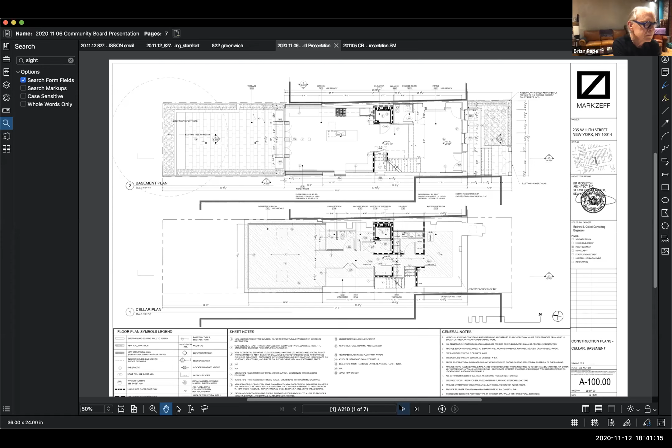We're looking at A100, which is the basement and cellar levels. On these plans, 11th Street is on the right and the rear yard is on the left. We are proposing to extend the cellar, the lower of the two drawings, at the rear. And then we are extending the rear of the first floor, where the cursor is right now. And then re-landscaping the rear yard. On the front, we are maintaining the existing front yard. We will slightly widen the steps down to the front entrance, and we'll slightly widen the front entrance. In the center of the plan, you can see plan north, the elevator, and plan south, the stairs. Next, please.

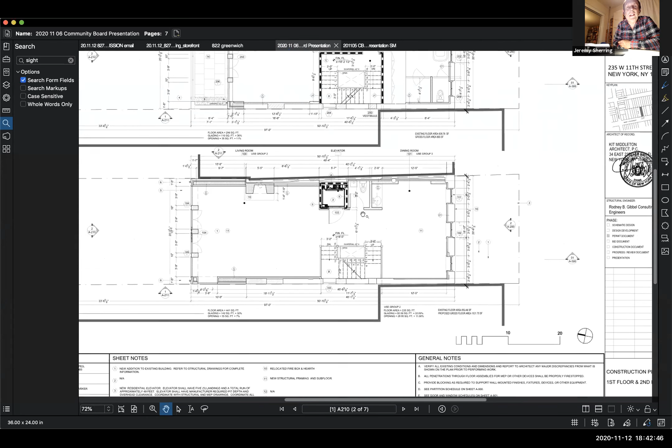Okay, so the upper plan, sorry, let's talk about the lower plan. This is drawing 101. At the rear, we have the living room, which is again extended like the basement level. And in the front, we have the dining area. Again, in the center of the plan, the stairs and the elevator. Then the upper plan is the second floor, which at the rear has the master bedroom, with a setback and terrace over the first floor living room. At the front, we have the master bathroom. Next, please.

Okay, looking at drawing A102, the lower of the plans is the third floor plan. On the front, no change. All casement windows will be replaced in kind. Center of the plan, again, the elevator and the stairs. And then the rear has a slight extension on the third floor, that's the rear bedroom. If we look at the next plan up, this is the existing fourth floor, which was added in the 1920s, we believe, per landmarks and historic documentation. So this will be a bedroom, and at the rear there'll be a terrace. It's pretty much per the existing envelope, changed slightly because of the location of the elevator and the stair. And then that partial plan is the roof of the fourth floor. At the rear terrace level, we'll maintain or renovate the existing skylight. The glass band you can see at plan center, on the top floor, is the skylight. There's an existing skylight there now, and our intent is to build a new skylight in its place. Next, please.

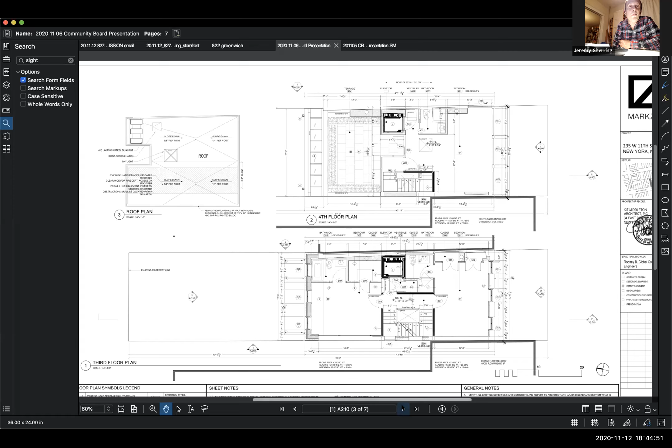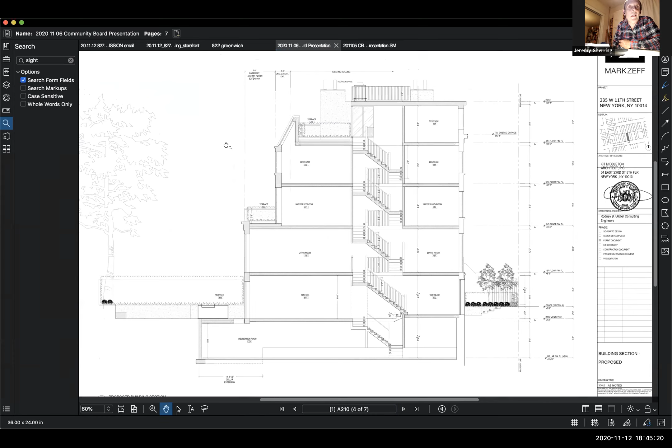Okay, so drawing 301. On the right is 11th Street and the front yard, and at the left is the rear yard. In this drawing you can see the extension to the cellar level below grade, and then the extension to the basement and first floors, and the setback at the third floor, which is maintained.

Excuse me, while we're on this drawing, could you indicate exactly where the excavation is in connection with this extension? So if we go to the cellar level, and then plan drawing left, you'll see the excavation. Keep going left at the cellar level. Yes, exactly, that's the below grade. And how deep into the garden is that? Hang on, if we go back to the... that's not correct, by the way. It has to... oh, there you go. Okay, sorry, you got it. Are we good?

So we're going to extend. We have another 24 feet to the rear yard from the inside face of that wall, so take another foot off that, so 23 feet to the rear yard property line. So the depth of the extension from the house to the cellar limit level is 20 feet. Okay, that's good, thank you. That's the extent of the extension to the existing masonry. That is not the extension to the existing wood framed addition that's on the rear of the building now. That's fine.

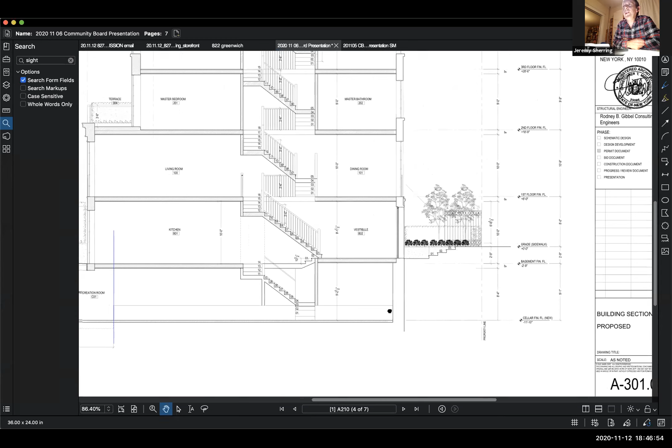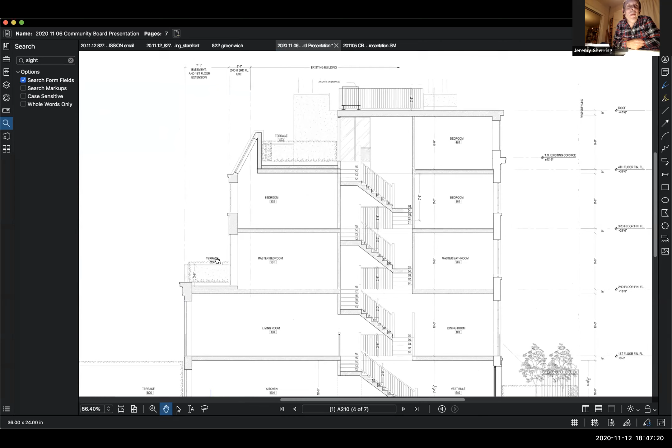As I was saying, the setback levels, second and third floor. Let's scroll down to see the further setback and get the top floor. We've got the setback at fourth floor level behind the skylight. The skylight is that diagonal line you can see above third floor.

You don't have an existing section or conditions plan or elevation as part of this package, do you? I have the elevations, but not the existing section in this package, though we have one. If you want to bring it onto your screen and share that, it might be good, because we often look at the building section, existing and proposed, to get a better idea of what exactly you're proposing, what's there, and the magnitude of these changes. That just helps us. But if you want to keep going, we can come back to that if the group wants.

Okay, let's do that version. Next drawing. So here you can see the existing rear elevation, and on the right the proposed rear elevation, and in the middle a photo of the rear elevation.

In the middle, the photograph's probably easier to understand. At the basement level, you can see the basement is being built out. The feeling is that the original addition is the first floor tea porch, and at some time they built out underneath that, then built on top of the tea porch as well at the second floor level. Then you see third floor and the skylight above that.

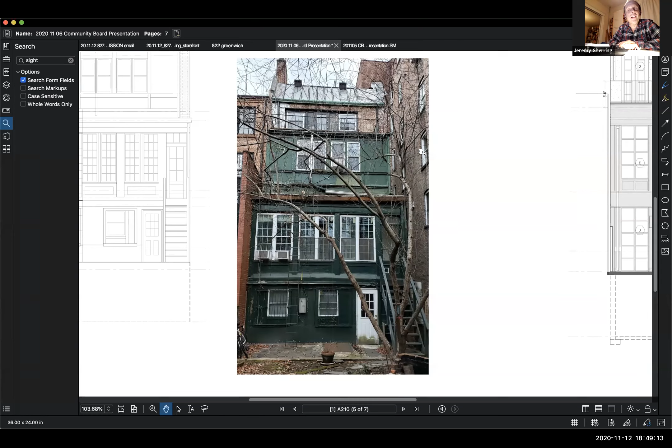So if we go to the drawing on the right, we've reinterpreted the spacing of the bays of the tea porch on the basement and first floor levels. Then we have the setback at second floor, and we've maintained the window openings on the second floor in the same way. The third floor has 3 openings, reflecting the neighboring townhouses, which similarly have 3 openings on the third floor.

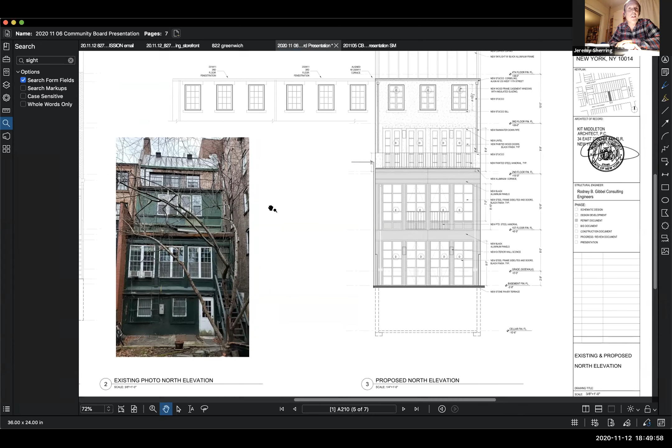Presently our house has been changed over and has 2 windows and a central door, but we're reverting back to the more traditional 3 fenestration third floor. Behind the skylight, you can see in the drawing the penthouse, or 4th floor level, which is set back behind the skylight, so you don't really see it from the rear yard.

Next drawing. So the street - on the left, the existing conditions photograph, in the middle the existing condition elevation, and on the right the proposed elevation.

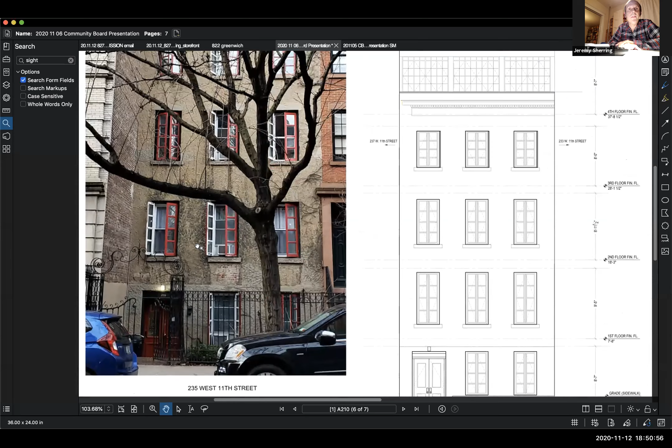First of all, we are proposing to completely renovate the existing stucco. Unfortunately the condition of the stucco is such that we'll have to remove it and put on new stucco. Our plan is, rather than this very rough textured stucco, to do a very smooth face stucco. On the right-hand elevation, you can see the front door in the left corner is slightly widened compared to the drawing in the middle.

The existing front door - that's one change. The other change we're making is that the window sills on the first floor are going to be dropped to floor level, which is actually the way the house was originally designed. The raised windows were changed over, probably in the 20s, when they converted this building to a multifamily.

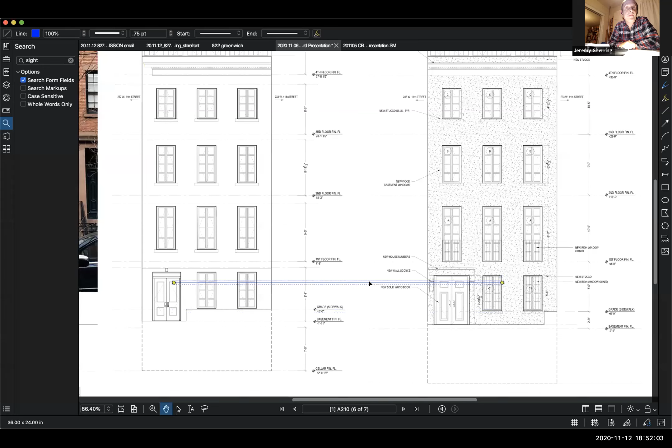Next drawing. You're also adding sconces, and yes, some texture to this - we're framing the entrance.

You're muted. Oh. You can hear me? Yeah, now we can.

Okay, we're trying not to change much at all on the street front. We did want to make the entrance a little grander, because it's going to be a single family home rather than, at the moment, a multifamily. And similarly, we're reverting back to the first floor fenestration, which was full height originally.

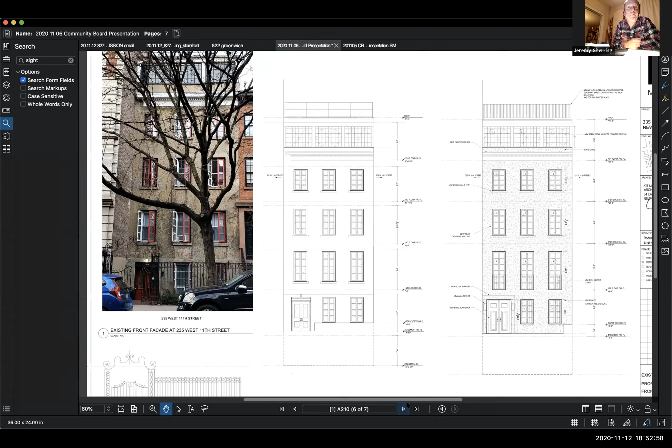Here we have renderings of drawing 210. There's a rendering on the right of the front facade and on the left, the rear facade.

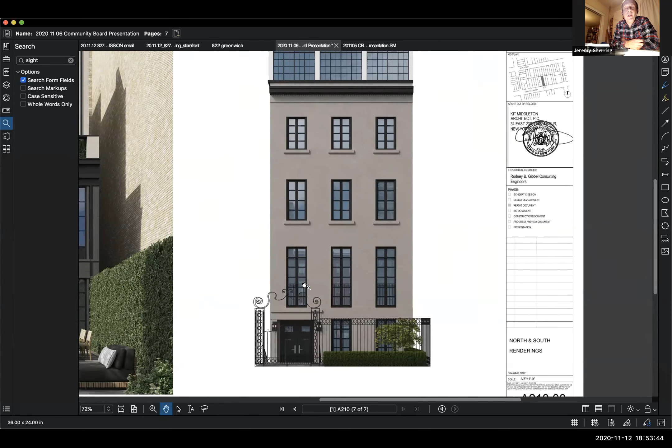May I put two questions about the front before we move on? Do we have a sample of the stucco color, or are we to rely on the rendering? We don't have samples in this presentation, but we will be doing test samples to present to landmarks in the future. The rendering is a fair representation for us.

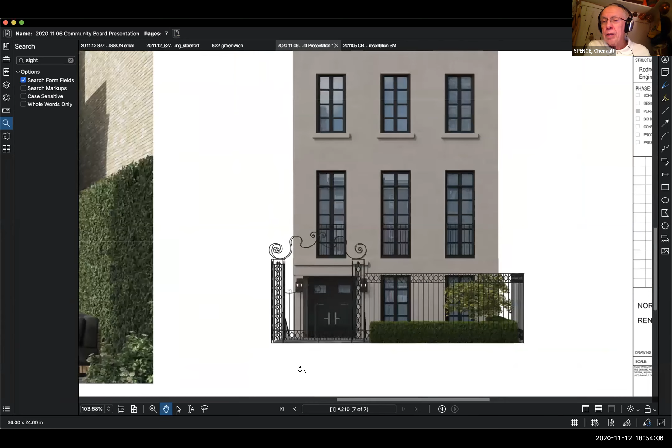And the doors, are the doors being removed? Yes, we'll be replacing the door as it's being widened, but the present door is not the original door, certainly. Correct, because the stoop was removed as well. I just need to note that.

Okay, so for the basement and first floor, the intention is to use a metal cladding, and then continue the stucco further up the facade on the second and third floors, which we hope distinguishes the second floor and the first floor and basement levels, as they are today, distinguished from the masonry section of the rear facade.

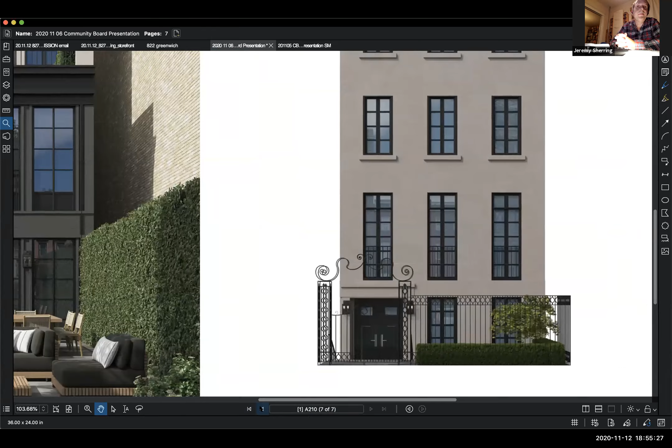We're keeping the existing street railing and gateway, and then landscaping the front yard and the rear yard. Those are all the drawings we have to show today.

I have a question. Wait, are we finished the presentation? That's it. Yes. Okay, Anita.

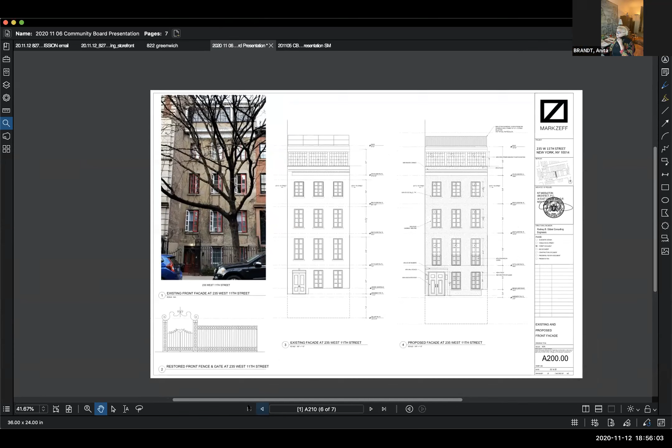Hi there, I have a couple of questions. One, I agree with Mustafa, we really aren't given as much information as I think we'd like. There's no existing plans, no existing section, no demo plan. We'd like to know what you're taking out.

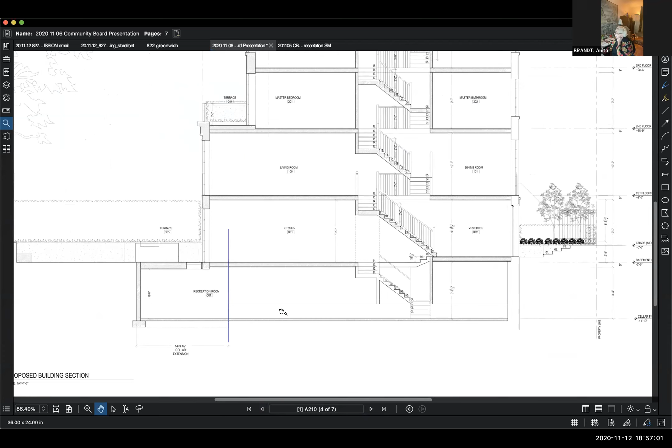Secondly, around the new widened entrance, you're recessing the areaway, I see. Excavating the areaway, is that correct? Correct. If we go back to the section — yes, so there's a recess in front of the front basement windows, it's cut away from the front. It's excavated, and you're building a new slab of some kind, right?

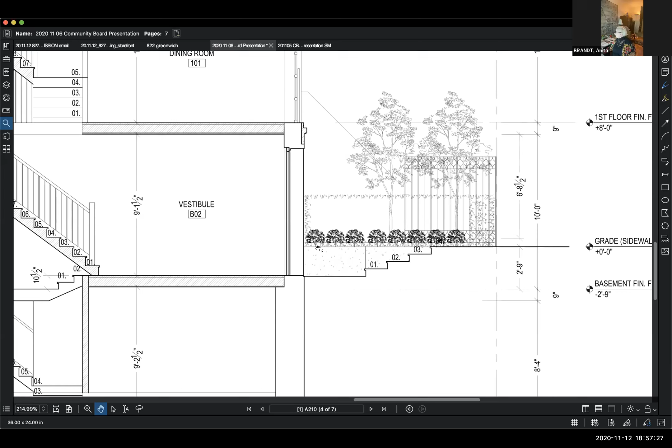There'll be bluestone. So you're dropping the level, that's what you're showing. Yes. I think that would be good to articulate because you're changing the relationship of the areaway to the sidewalk and the street, and how people perceive it. I think that would be good to be very clear about.

Maybe we can look at the floor plan. If we zoom in — okay, so the area remaining at the level it is today is the planted area on the left. The steps go down and the line of the lower step becomes the setback. Got it, good.

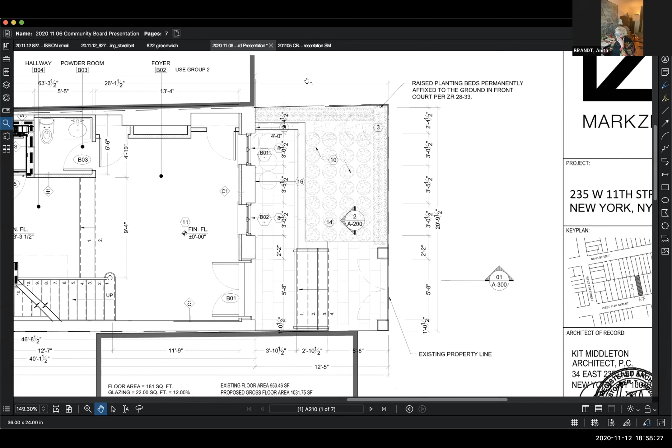And then finally, for example, the door enframement on the front facade and the information, like detail sections, what's the profile like? Is it going to look like Disneyland or is it going to look like something authentic, because that can go either way. I need it in drawings. I believe you, but I don't really want to believe you, I want you to show me, because I think these are the things that make or break a good project. Also the light fixtures, we're interested in that kind of thing. Understood, just describe it as best you can please.

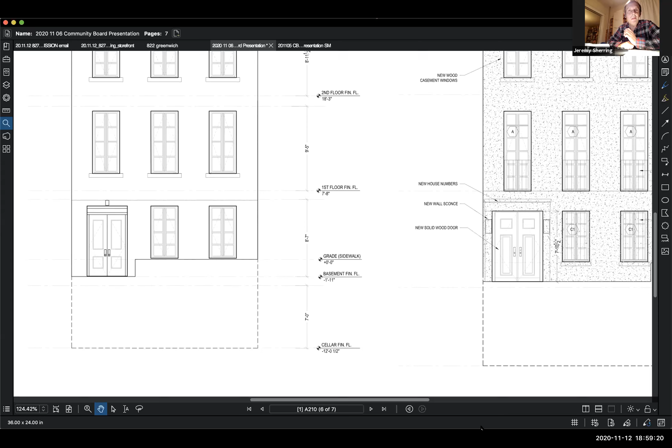Yeah, the plan is to just make a very subtle raised border around the door opening, and then over the top of it, a subtle but pronounced lintel over the door opening. Okay, not too subtle, that's exactly my problem right there. I think you should articulate that, whatever that is, whatever inches it is. You don't want it to look too flimsy either, otherwise it's going to look like a shadow, a ghost of some kind.

And finally, and then I'll be done. I like the massing of the rear and all that. Did you consider having the red brick above, maybe on the top two floors? Yes, just because...

Here's the answer, I think: the side facade of this townhouse exists because of the side yard next door, so the stucco goes along that entire side facade and wraps around on the second and third floor. Making it brick would have continued the finish of the neighboring townhouses, but this house was altered a lot in the 20s, and that's something Landmarks has told us to focus on, since it's slightly unique to the row.

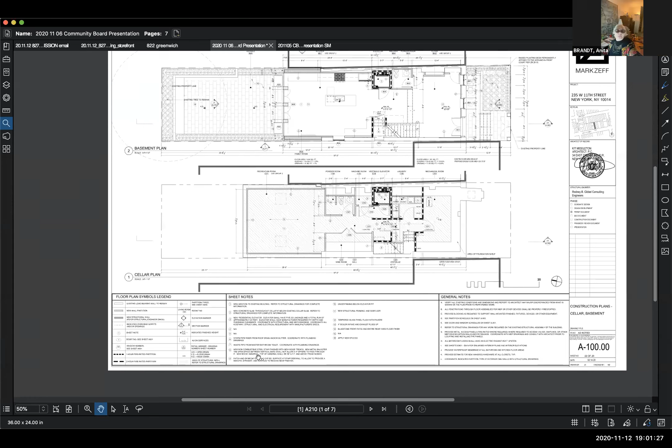That makes perfect sense. So in other words, you got a whole side facade to stucco. Yes. Are there other members of the committee who have questions or comments? Yeah, just one other thing.

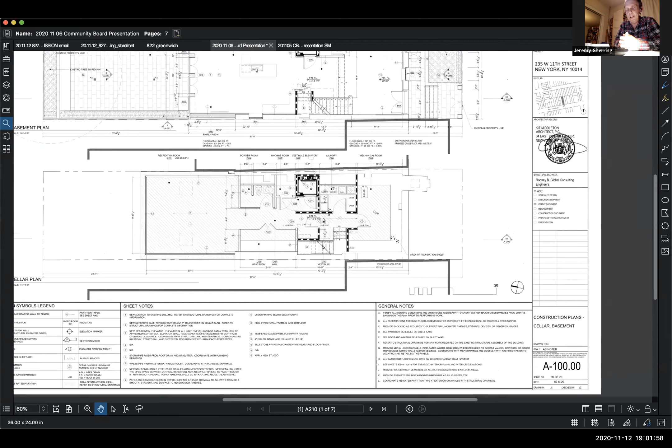Were you able to find some historic photos to help contextualize this? We have the tax photo, that's as much as we got, and then we got some Sanborns from the 1800s, but that information just confirms what we know: a wood structure on the rear and a masonry structure in the front. The tax photo is the most historic we have, and it's pretty much exactly what we see today.

Okay, good. So I have a question regarding the rear facade. It does seem that much of the rear facade had been altered in the past, as you described, tea porch and so forth. You're making the effort to restore the tripartite windows on the third floor, which I appreciate and commend. However, I'm not sure why you're taking on the second, first, and even basement floors and not using the tripartite theme on those levels. You could get just as much glazing, but instead of dividing it into quarters, you could use the tripartite division into thirds.

Even though they'd be larger portions, they would still follow the theme of dividing that rear facade into thirds. Have you considered that? Yes, we looked at doing thirds and quarters. The reason we're leaning to the 4-pane is really, could we look at that rear rendering again? The reason we're working with four is because of the influence of the tea porch bay system, which was four windows. Yeah, but that's not original to the building.

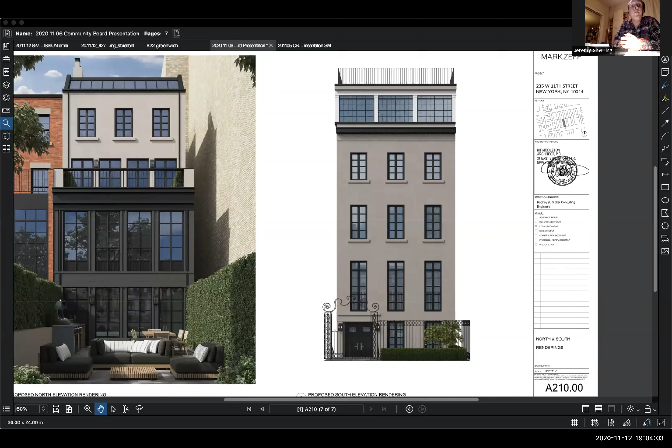Well, it's interesting - Landmarks is very fond of the tea porch extensions, and it's actually very historically significant for them. We worked with them trying to find an expression that developed from the existing tea porch that's there now. And I agree that the three-opening is a traditional masonry solution in townhouse architecture, no question.

Are there other members of the committee who have questions or comments? Yeah, I have a question regarding the ironwork in the front. Can you confirm that it's totally a restoration, not a replacement in kind of any sort, but entirely a restoration? Because the photograph and the rendering look slightly different, but I can't quite tell. No, the intent is to restore. Okay, thank you.

Have all the committee... Yeah, just one other thing. You said on the first floor you're lowering the windows, correct? Yes. Okay.

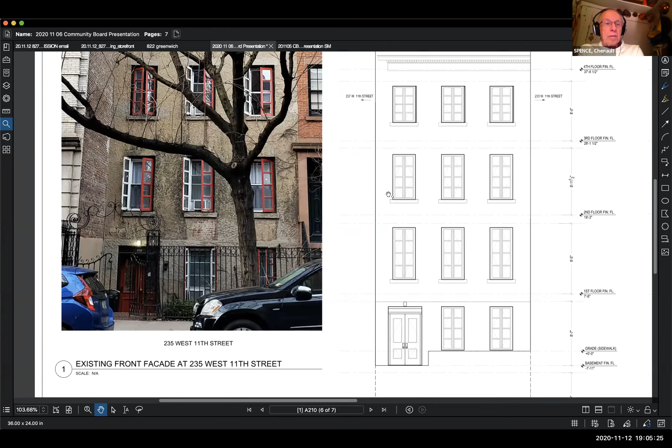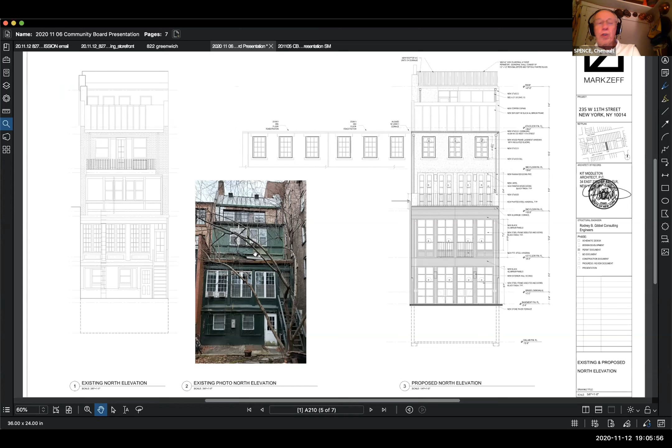I have one comment of my own, which is on the rear facade, along the lines of Brian. I understand about using the tea porch idea below. The question is the third floor, next to the top floor, that might be considered as three French windows, which look very nice. It's just that's where the interruption comes, or the change, and there's sort of a third interruption by the four there. That's it, thank you.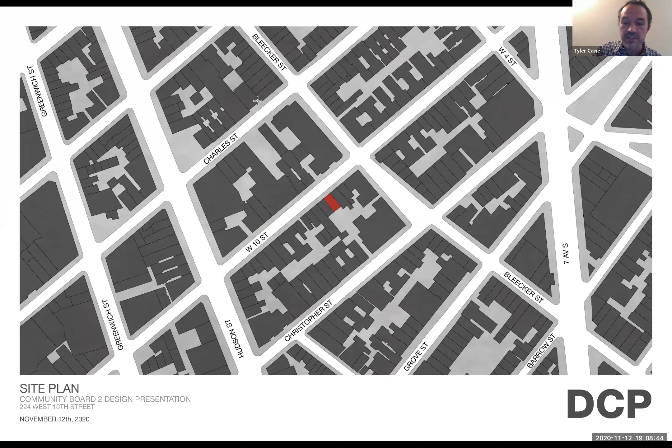A little background on our site: our building was constructed originally in 1848 along with its neighboring sister townhouse. At the time, they were twins, built by the same developer. In 1926, there was a renovation that changed the front facade condition, removing the stoop, removing the front entry door, and turning it into a multifamily building. In 1969, this was included in the Greenwich Village Historic District.

In 2010, there was a new renovation of the front elevation that restored it to its original detailing. It used our neighbor 226 as the precedent to replicate, restoring the stoop, restoring the front door, and replacing all the windows in kind, and that is where it has left today.

Maybe some people on this committee were part of that review of that restoration. That was a couple of years ago. I remember it well.

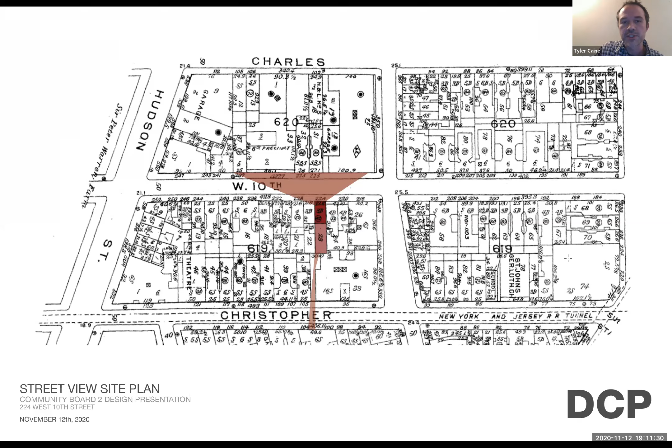To show you what you can see from the street, basically a lot of the visibility comes from West 10th Street, mostly from the north side of the street. We do have an incidental view between a gap of 2 buildings on Christopher Street, about 8 to 10 feet wide, a car rear driveway access. So there is some incidental visibility to the rear elevation, and both of these things were taken into account when designing this new penthouse addition.

The incidental view I was speaking of—this is the view between those 2 buildings on Christopher Street. You can just make out our white brick with black trim and black cornice. If I stuck the camera through this security gate, this is what you can see again of our rear elevation behind that tree. That is our site.

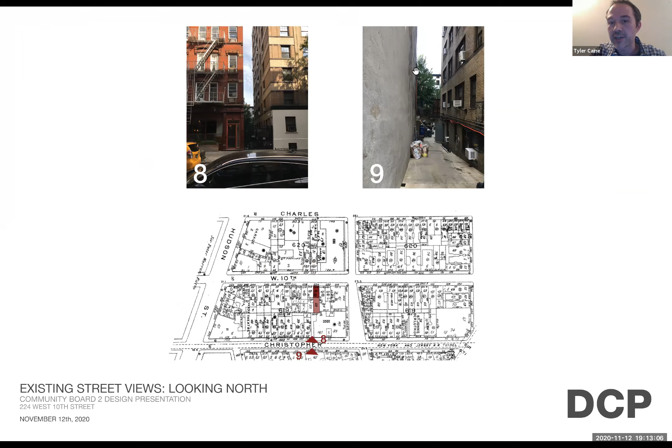Just to talk through briefly, I'm not going to go through all of them. I think there are numerous precedents throughout the district that have a rooftop massing structure, something discrete that could take the form of either a bulkhead, a stair bulkhead, or a penthouse addition. Some of these were historic pre-landmarks designation, and some have been added over time. The basic point is that this language of having a discrete setback massing is something that has limited visibility from the street, is characteristic of buildings of our scale and size, 3 or 5 stories, and making it relatively appropriate.

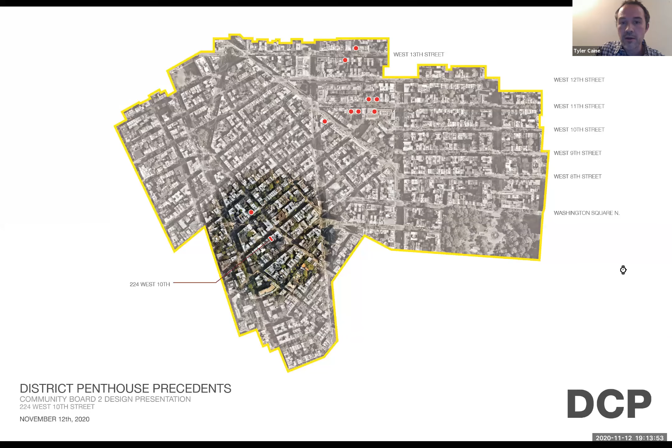I'll focus on just a couple very quickly. This is an example of 114 West 11th Street, where we can see a portion of a penthouse addition from a side view where a relatively considerable portion is visible from the street.

One that I think is most applicable to us was actually a relatively recent renovation of 138 West 11th. You can see they have a very slim line of material seen from the street that goes atop the existing historic cornice. I pulled out from the permit description that the modifications to an expansion of the rooftop addition will not eliminate any significant architectural features of the building, and that the visibility of the addition over the front facade will be limited. I think this, in many ways, mirrors our goals for this project. Even the language and composition of this building is very similar to ours - red natural brick, dark windows, dark black cornice - aside from the fact that this is a double wide townhouse and ours is a single. This was something we used as a roadmap to try to emulate in our penthouse proposal.

This last one is just something I wanted to include. This is actually directly one street up from us on Christopher Street. What you're looking at here is a penthouse massing seen through an incidental view on West 10th. So if you were standing at our front door, this is what you would look at. Whereas this in the lower right is viewing from Christopher Street and seeing a reasonable, but again relatively discrete massing with simple articulation. I use this as an example because it has a patterned standing seam copper material cladding, and that standing seam metal, I think, is what we thought was an appropriate cladding for this setback penthouse addition in this bulkhead language that would be appropriate to our district and site.

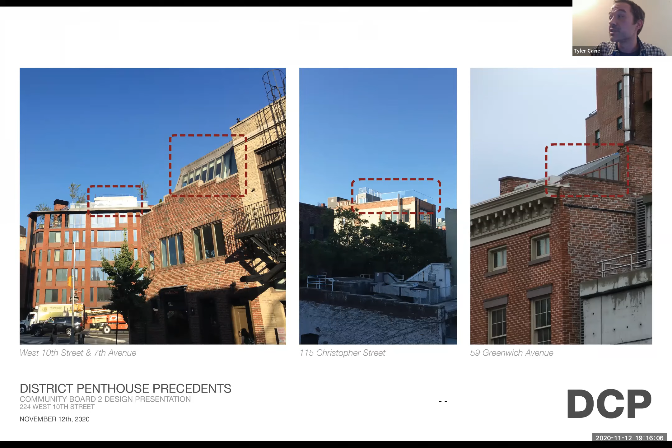So I'd like to walk you through the massing of our specific penthouse addition and both the building and code parameters that we were working within to try to minimize visibility from the street and still create a code compliant and occupiable space.

This is an existing roof plan of what is there right now. West 10th Street is on the left side, the rear yard is on the right side. We have 2 skylights that would be removed, 2 exhaust fans that would be relocated, and an access hatch that would also be removed. This is the line of the existing cornice, the rear cornice on this side.

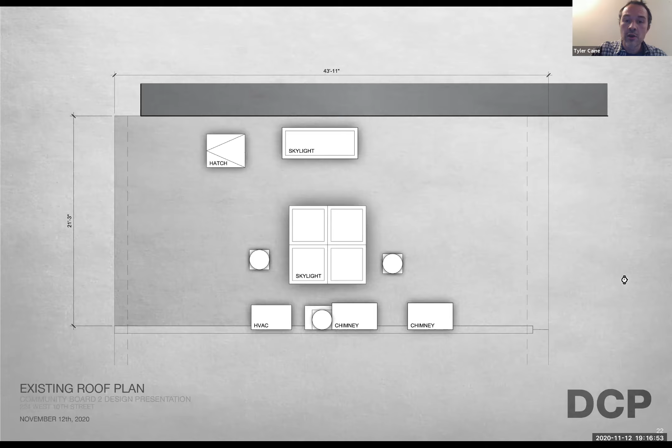So where we started was, in order to provide roof access, there was a certain amount of vertical climb we had to achieve. Even if we used the steepest stair code would allow, we still had a certain amount of steps we needed to accommodate. Given the rise, we also needed to accommodate a landing. We started that stair right at the existing opening, stair opening that goes through the lower floors of the townhouse.

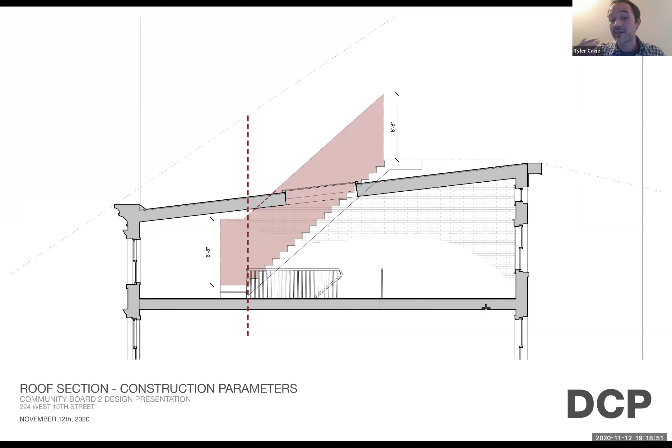That stair opening is something we wanted to align to maintain the integrity of the volumetrics on the inside of the house. So we made sure the inside of the north face of our new addition was not compromising or coming over that stair opening. There's also a minimum code required head height for stairs, which is 6'8". That added another meaningful parameter we had to accommodate to get from our 3rd floor to our new penthouse level.

In the end, that was paired with two complementary parameters: how thin we could possibly make the floor structure from a structural perspective, and on the opposite side, the minimum code required ceiling height for an occupiable space, which is 7'6". Those things together placed the height of this lower floor and the height of the wall on the north side of the penthouse addition.

From there, like the existing roof, we were sloping this roof back so it would not really affect the view from West 10th Street. But these were the things that got us to a final point of what we are proposing: bringing this stair up to a landing that goes across the entire space, east to west.

This would provide access to a small terrace on the south side of the building with a new railing. On the front side, this is the maintenance platform along with a maintenance guardrail that is outside and below the view of the street from the opposite side of West 10th Street, maintaining these critical heights to make the space usable and ultimately compliant.

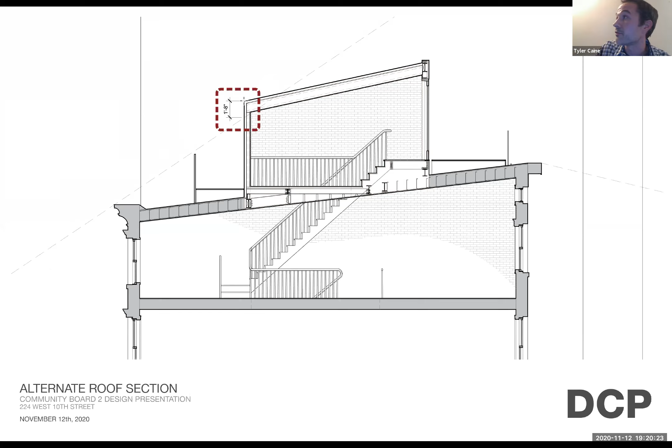What that left us with was about 1'8" of visibility going across that material across the front from east to west on this addition.

These are the steps back down to this occupiable room. The whole thing is basically one room, and this is a stair opening that emulates the stair opening that goes through the rest of the townhouse.

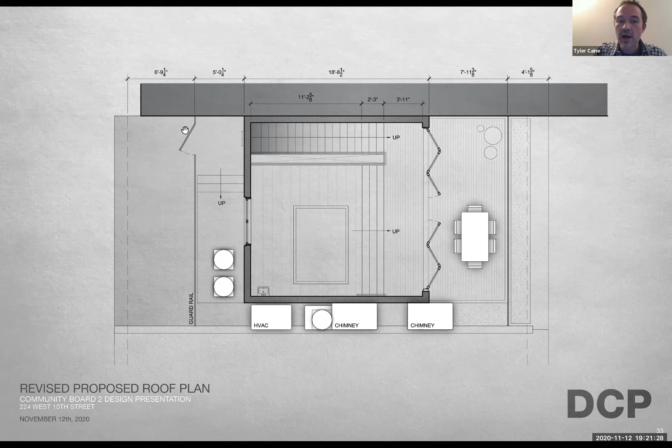On the north side, we have what could really be called a maintenance window, to service these mechanical units. We kept that window low enough—it's not really a door—so you don't see it from the street. You'll only see unimpeded continuous material across the street instead. This is the guardrail, FDNY access, and steps back down to the roof level.

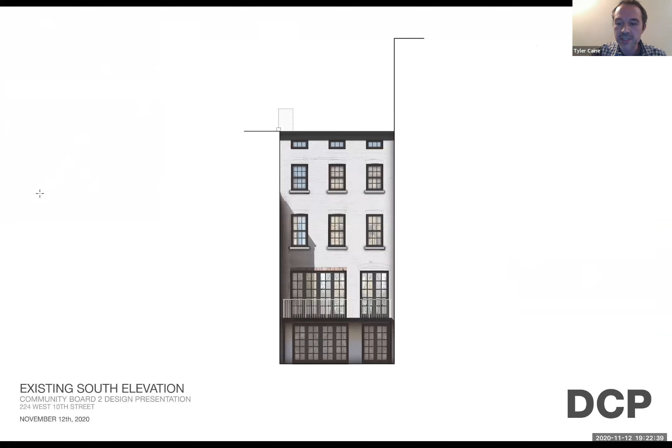Similarly, this is our existing rear elevation, and what we are proposing to add is to mirror on this elevation only the white painted brick, in the small amount of material and surface area that we have. Doing a detail of that patinated zinc that comes across the top as a flashing cap, integrating with the roof membrane, and copying the language and even the same fabricator of these opening door systems in blackened steel that was part of the 2010 renovation to the first floor and garden level.

We're adding a small HVAC unit on this side, which would be shielded and screened in a durable hardwood in the back. And then the railing being installed would also emulate the railing—a very simple vertical profile—that was installed as part of the 2010 renovation.

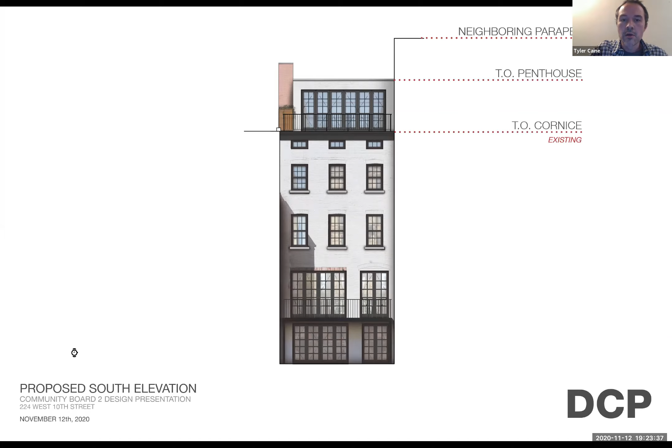So we've constructed a mock-up of this. I don't know if any of you have had a chance to see it.

We did take a series of street views that walk around. I'll note that we originally installed the mock-up, and then when we were on site, we realized we had a few inches to capitalize on to completely align the backside of the wall with the existing stair. We also worked with our structural engineer to slim down the construction of that north wall to a higher gauge, smaller stud that allowed us to capture another 2 inches. So we actually rebuilt the front wall of the mock-up and moved it back, which took 2 or 3 inches of visibility off the front.

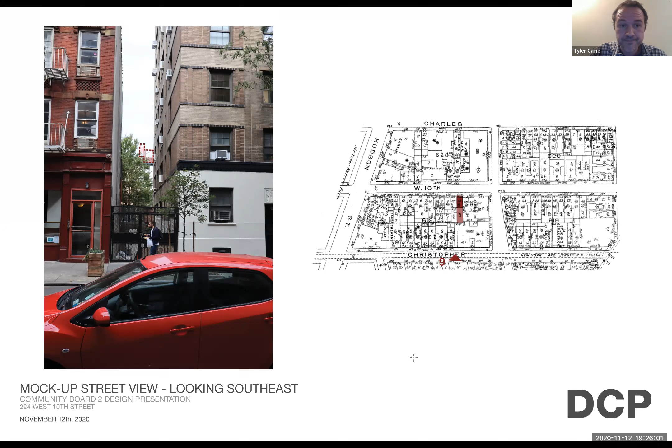Just to go over the materiality: really the vast majority of what we'd end up with is already there. The front facade—the existing brick, the existing painted black windows, painted black trim and window lintel detail, and all the existing brownstone at the garden entry—that all remains. What we're adding is that patinated zinc setback from the street on the front and western face of our new penthouse addition, and the door/window system would be in a blackened steel finish.

On the rear elevation, the existing white brick is exactly what we'd be matching on top of our new penthouse addition. The existing doors on the garden and first floor level would be exactly the same, even the exact same manufacturer as what was installed in 2010. And then we'd just have some tropical hardwood added for durability's sake as a screening material around our HVAC unit.

That's the entirety of the presentation, so please allow me to answer any questions. Okay, I'm sorry, I have two.

The color that we're seeing in the small visibility in the front—yes, is that dark gray? Am I saying that correctly? Yes, it's a natural patinated zinc, so yeah, it would be a gray.

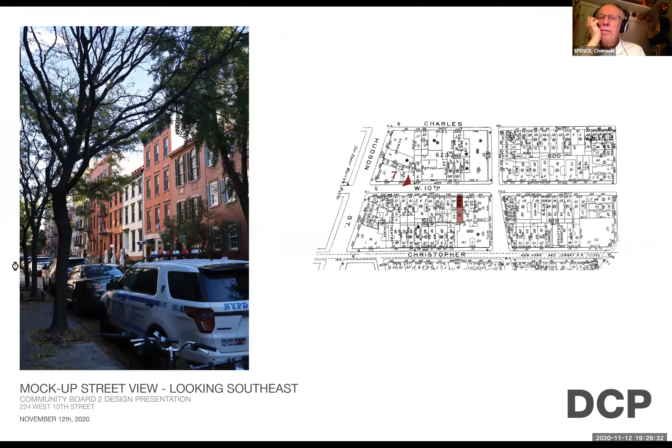Thank you for the presentation. I just had a couple of concerns, and perhaps you can give me your thinking on this. The drawing showing the proposed north elevation, which is of the front facade, the zinc addition. And I understand the beauty of the material, weathered and whatever, may not be coming through, but I find the overall composition and appearance to be, number one, atypical with this mechanical access step down, stair, and just the overall appearance is not appealing to me. I don't know why it has to be so back of house. It is the front facade, and yes, you can't see it from every place else, but we're looking at it now, and all your neighbors will be too.

Sure, I think that again, most of this is not going to be seen. All that is going to be visible from the street is just this band of material up top. And so, I know that. I heard you. Sure. Okay. But I'm just saying, we don't have step downs on the front facade of a building like this. That's very unusual, and yes, but we are a lot of neighbors here. We're going to be looking at it. So I just think it's an odd approach, and maybe there was something you could do to get rid of this little

Sorry, you cut out a bit there. Exterior mechanical stair, and maybe, I don't know, it just doesn't look very good. It bothers me that you have a stair going to what has always been the front facade, even though you're treating it as the back. So anyway, take it for what it's worth, but I think you could cheer it up a little.

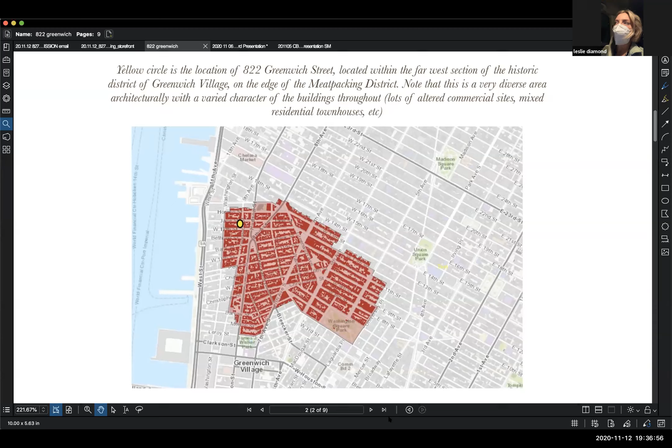The next slide is just an up-close view, showing where the building is on the block. This is from the Landmarks website, and it talks about how the building was built in 1957 for the Kansas meatpacking company.

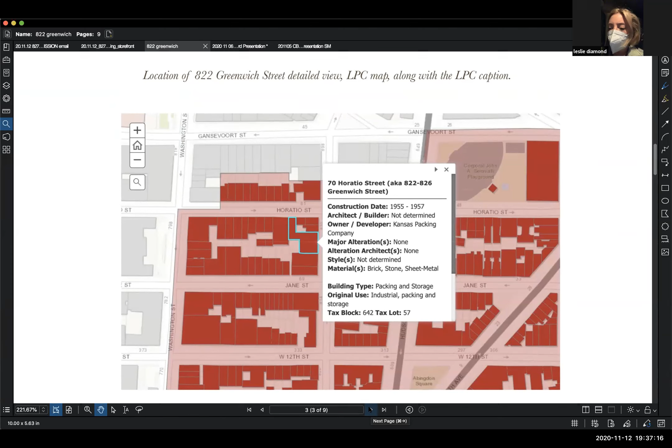In 1980, they converted it to co-ops, and this was the architectural rendering for that. In yellow, I circled this decorative accent that the architect put on. At the time, the architect called it a conversation piece, which we think is quite funny because it is quite a conversation piece. It serves no purpose, has no tie to the original building or the original decor or look of the building. If you go to the next slide, you'll see it up close.

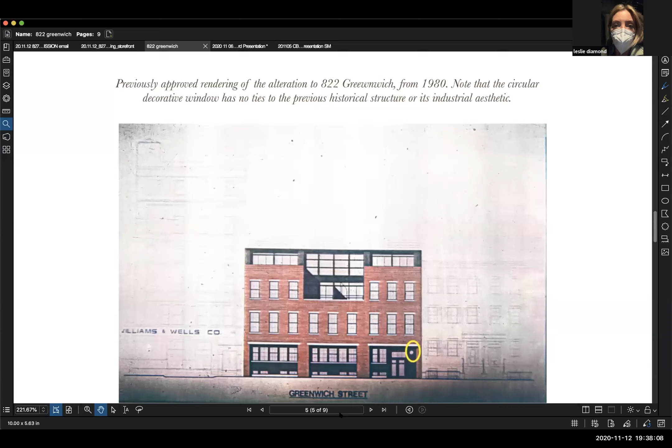Well, rather not take off, but what I'd like to do, next slide please, is keep the frame, take out the stucco, take out the window, and replace it with just a solid piece of etched safety glass. In the lower left corner, we would have the building's address, 822, prominently displayed, unetched. A nice, clean, industrial look.

This is a look that one of our neighbors, 829 Greenwich Street, has a similar thing. So we thought, oh, that looks nice, it would be a better way for us to display our building's address. It fits more in line with the industrial look, and we think it would be a nice upgrade.

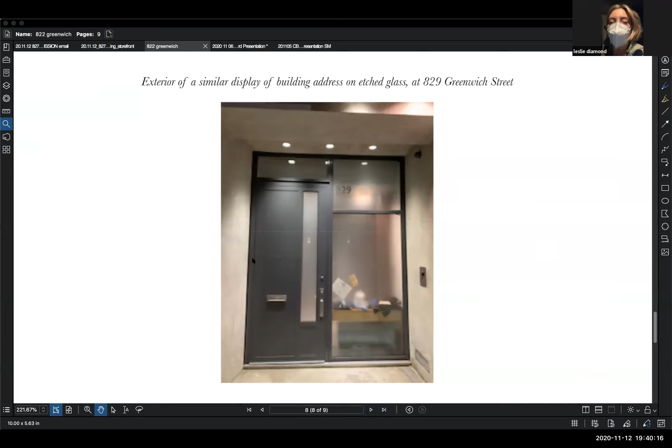Are there questions from the members of the committee? Well, I would like to note that when I went by there a couple days ago, it's very hard to find the address. I've also been in the building several times—it's not a very inviting entrance because of the step and so forth, not handicap accessible. I know that's not part of your scope, I'm not criticizing that as far as your presentation, but that little porthole kind of window has always struck me as being out of place. So I find this to be a very refreshing approach to this alteration, and it's very minor too.

So, yeah, you know. Oh, by the way, any maybe I—problem? I'm sorry, I didn't mean to cut you off. I'm in a car, so I hear the navigation system going off at the same time.

I should note that our building was broken into a couple times in the last year, and there's been some vandalism. I'm doing a whole renovation project which Landmarks approved entirely. Just this one piece they said was unusual, and this is why I'm going to the community board. The doors are being replaced with solid doors, matching green. Everything, as you can see in the rendering, is going to be more homogeneous, clean, and neat.

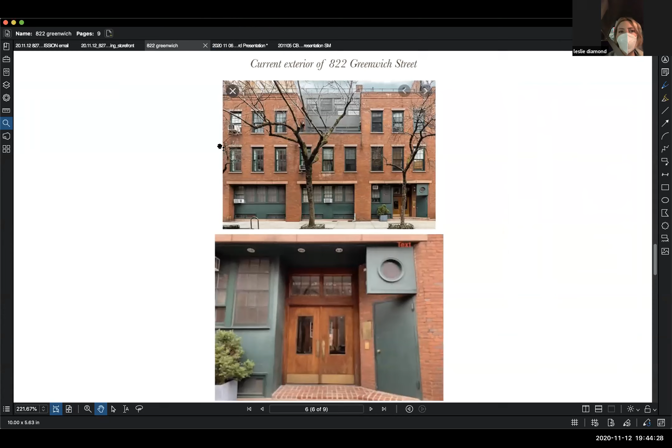For perspective, it's a 40 by 40 inch frame, so the interior dimension is about 35 by 35. We were thinking about doing numbers about 8 inches high, so they're clearly visible and understood from the street.

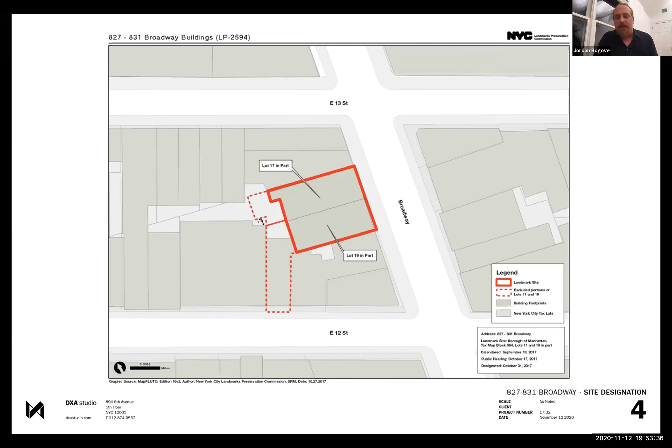Great. So there's an L-shaped lot on the south portion, which extends, has a finger or tail that extends down to East 12th Street. What we're going to discuss tonight is that whole portion is not part of the designation. So one of the solutions to the bulk issue that you identified when I presented before you previously was kind of too much mass visible. The big move was really shifting that mass onto the non-landmark site over here, which we'll get into in a moment.

The tenant there started to make some little additions to the design, adding these great Juliet balconies and some storefront elements. A number of those we have elected to keep in the design.

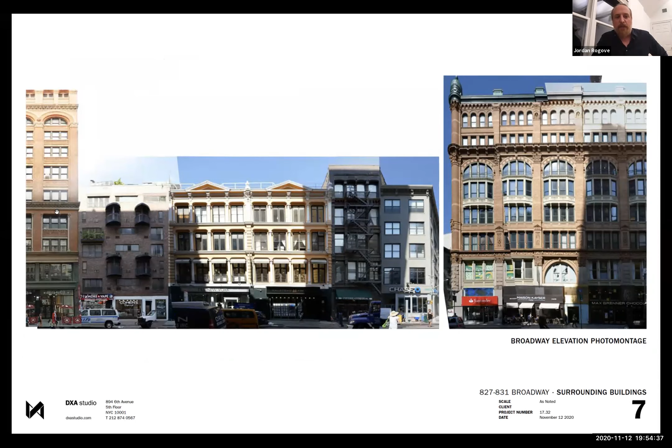Here's an elevation montage, a photo montage, to give you a sense of how the building is situated between a number of other larger scale buildings. To that point, we wanted to share these images of much larger buildings than what we're proposing in the immediate one block vicinity.

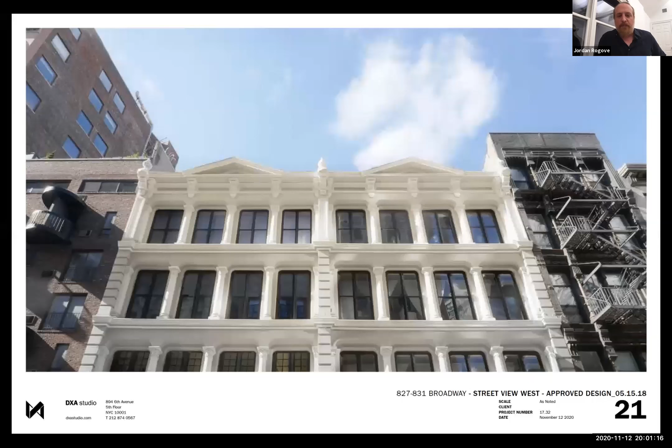I want to now enter — can you guys still hear me okay? I'm not seeing any of you on video. We hear you loud and clear. Excellent, great. All right, so what I have here are some renderings.

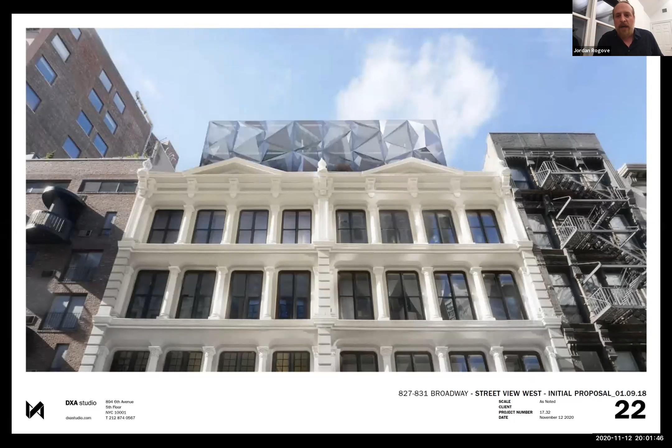Before you is a rendering of the addition directly across the street up against the Strand bookstore, on the other side of Broadway. This illustrates that it's not visible from most vantage points along Broadway, in stark contrast to what we presented to you in November of 2017.

This is the area of greatest visibility along Broadway, right before Union Square. With the additional setback and reduced building height, we believe it disassociates that massing or addition from the base building to a point where it looks almost like appurtenances and other incidental equipment on the roof, especially by comparison to what we presented previously.

This is a rendering of on top of the setback above the existing building on the 4th floor with our 3-story addition. You see that the envelope is composed of slumped glass.

One of the concerns Landmarks had was that the relationship of what we were proposing did not have a strong enough relationship to the existing building. So we took this same idea of reflection and distortion and applied it to a composition very much influenced by the Griffith Thomas building down below — the depth of facade, the ornament or quoin expression happening down below — but we're doing this all in glass.

That glass is still reflective and changes colors through the day, distorting the world around it, which was the basis of the original design. But Landmarks felt this was much more in line with celebrating the building and the artists in equal measure.

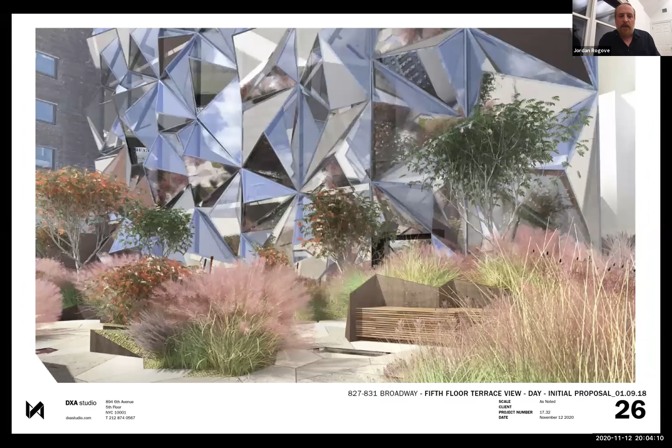The landscaping up here was an important part of the overall concept — we borrowed from the flora of East Hampton, where de Kooning ultimately finished his career after leaving the city, and a lot of these plants are from the landscapes he painted later. We tried to connect that way and also provide a basis of color, because he created such vibrant, colorful paintings while in this building. Here's the previous design, and then at night.

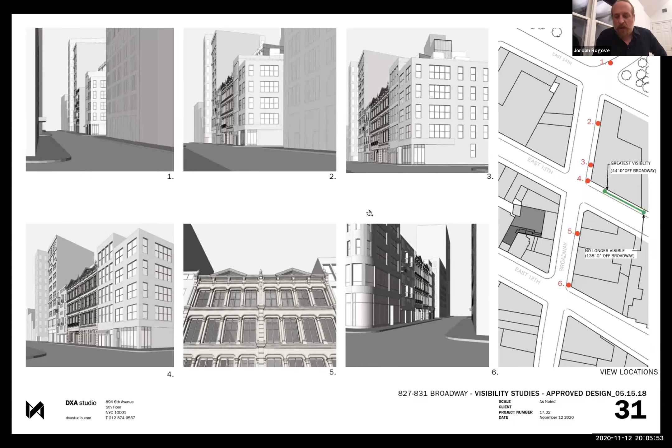Here are the visibility studies, with a key on the side. The two renderings we showed on the streetscape were the areas of greatest visibility: rendering number 2, up close to Union Square looking southward, and the corner on East 13th Street, where the top part of the top floor is visible, but from all other vantage points it is not. This is the comparative visibility study with the previous scheme, where we were actually celebrating its visibility, and the building was much taller and not set back as far.

The last component, which CB2 was in full support of, with just the exception of the storefront on the north part of the building, was the overall restoration, bringing the finish of the marble back to its original state, cleaning it up, repairing it, and maintaining the south portion of the storefronts that were altered by the antique dealer tenant. On the northern portion, we opted to restore back to the original cast iron, with infills in line with what was there during the period of significance, which would be the late 50s and early 60s. We like that eclecticism, that different periods of history recorded, since this building's had so many lives, and that seems to be part of what we're celebrating.

The last component is this plaque down here. We want to work with the Willem de Kooning Foundation to create an interactive plaque, which with iPhones you'd be able to learn about the artists that practiced there, and learn more about de Kooning and Poons and all of the artists that made this such a special place. So with that, there's some final details on the storefront, but that's pretty much it.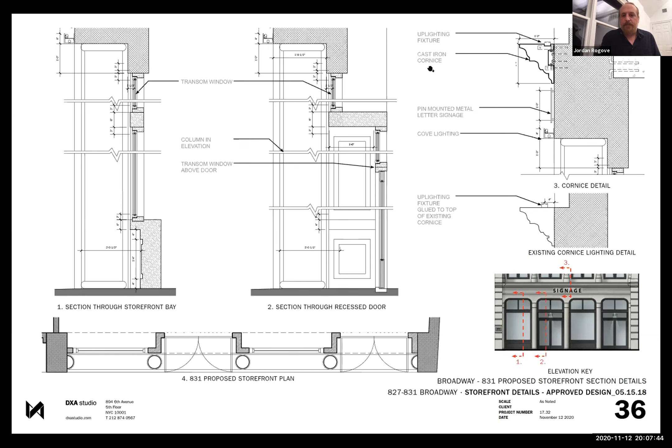Thank you. Thank you, I have Jordan. Just a couple questions before we go along. I want to be clear about... oh, we just had the slide up. I'll go through in order. I don't know that we need the slides even for most of these.

You showed contemporary structures as examples. Am I correct that none of those of the modern era was approved by Landmarks? Those are just examples of what those structures look like in the area. This isn't a landmark district, it's an individual landmark, but that was just examples of other buildings. Okay, exactly, this is for the notes now, I want to be clear that what I say is correct.

Regarding visibility, is this the only picture, or have I missed some? It's not visible from all but two vantage points. One of them is just south of 14th Street on the east side of Broadway, just as you're approaching the movie theater. What you see here is the top story poking out from behind the corner buildings at East 13th and Broadway. So this is the most visible that the building, or the addition, is on all of Broadway.

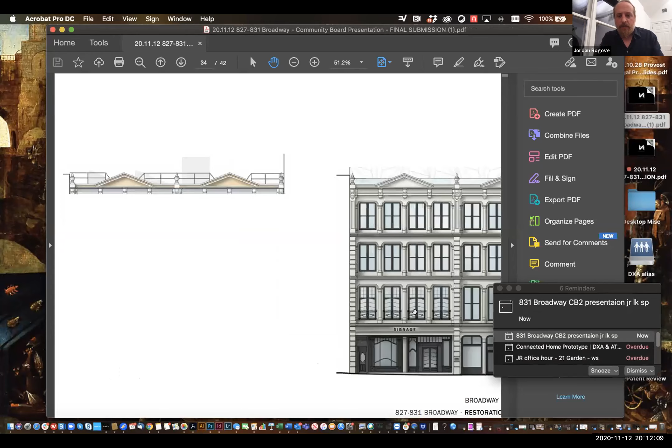Do you have that picture of the existing condition of the north? I think it's important for us to see it. Can you enlarge the proposed north storefront? Okay, there's the proposed, and if we could see the slide showing the existing north storefront. There we go, there it is.

So it's not rendered, but when we see the design of it, it does look similar to the other one, just in a different configuration. Exactly right. I think what was difficult about this side is that there's a lot of opacity - solid doors on either side and very limited glazing, which makes it difficult for a retail application. Should retail ever come back, the amount of transparency is kind of vital to the success of the space. That, plus the fact that this infill came in the late 80s - the one on the south was done much earlier, in the late 60s or early 70s with the antique dealership. This is much later, and a little problematic for retail use - just to explain our rationale.

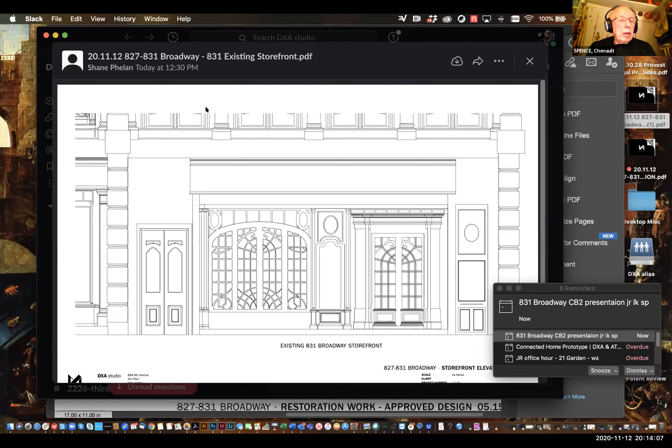Oh, that's all good to know - the south in the 70s and the north in the 80s. Yeah, north I think. When we did the presentation there, the north windows weren't there in the 80s tax photo. So yeah, exactly.

Now, could we have questions from the committee? Hello, I do have a question about the storefront - the cast iron storefront.

I'm curious that you switched the tonality - on 827 it was switched from a very light color rendition to a very dark color rendition, but on 831 you did the opposite, going from a very dark rendition to a very light rendition. I'm wondering why you're reversing like that, and what's the purpose of that choice for color?

Oh, and making the infill dark - it's our best understanding, and all we have are illustrations to substantiate this, that this limestone color of both the marble above and the cast iron below was all made to look like stone originally. So we're trying to bring that back, so the structure and body of the building is all of that tonality, and the infill pieces are expressed a little darker. It's really just going back to the images or illustrations we had of the building's early years.

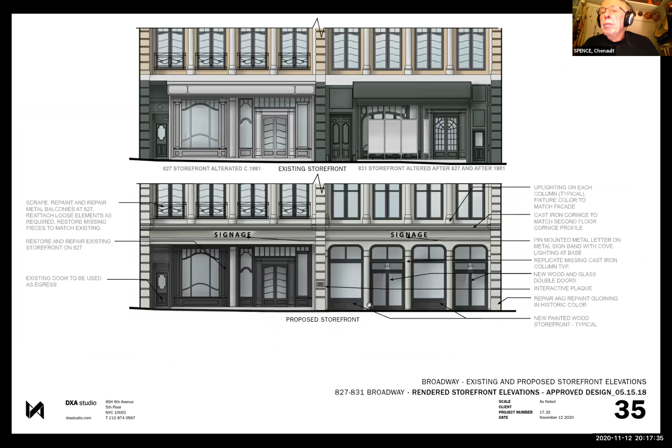I would like to, for clarity, go back to the roof plan from above that shows the intrusion onto the landmark structure. You got it. Right here. We're getting inspirational.

Just to be clear, for those who haven't studied in detail, it said that 5 feet is the maximum distance at that point. To be precise, it's 5 feet 5 inches at its absolute deepest. And about the square footage, I know it's hard to compute. 47 square feet of intrusion.

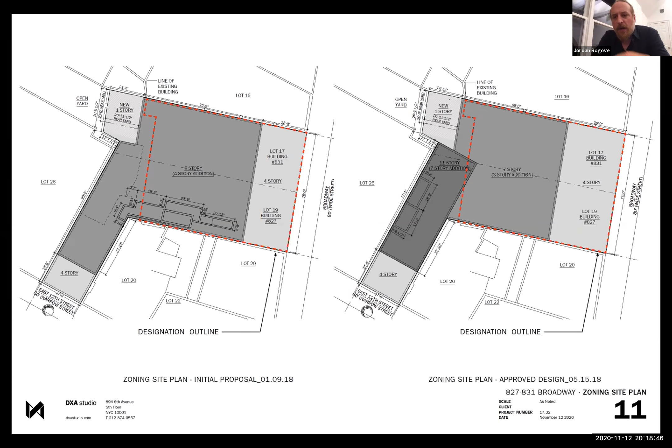Per floor. And how high is that structure? Lester, Shane, do you want to give the exact dimension? It's an 11-story, so it's... it's a 7-story, if you go to the axonometric. If I could just say how high it is above the roof, above the existing roof, and total. So it's 48 feet above, and the new total is 84 and a half.

Got it, sorry, I missed it at what, 40... 45 above? Well, it's 48 feet above the addition, and then another 36 and a half above that. So a total of 84 and a half in total above the original.

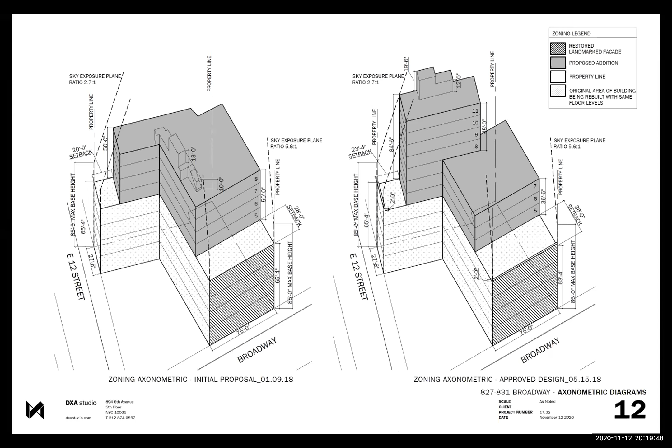I have no more questions. The committee is finished. No, I have one more comment.

A question about the second floor Broadway windows, I think that's on 827. The mullions and divisions on the second floor windows used to match what was next door. I'm wondering why you're not preserving those, continuing the match. It would look much better. It's the same situation, everything that happened there happened later, in the 80s and 90s. The idea was to restore a majority of the fenestration back to the original double-hung and group double-hung arrangement, as you can see it's much different now. We'd keep the windows in those select areas as a vestigial recording of history, but restore the rest of the building back to what we deemed the period of significance, when the painters occupied the building.

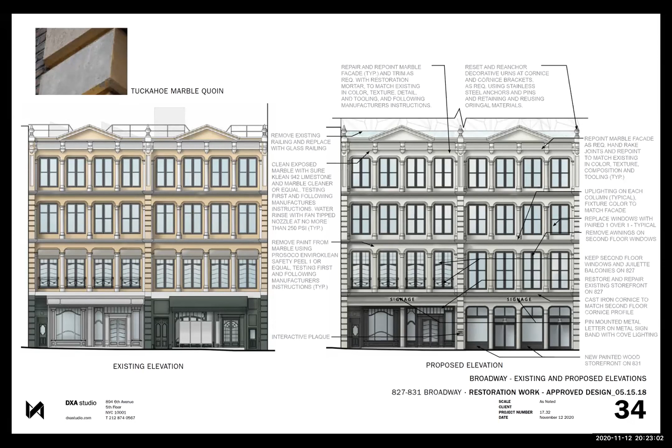Okay, is that all for the committee? My comment is about the transom, the tiny transom above the door, and looking overall, not just at the storefronts. The two show windows are disturbingly plate glass against the entire rest of the facade, where all the windows are broken up in one manner or another. Right, thank you.

If I could respond briefly, we tried to take our cues for this storefront composition from the limited information we had of what this building looked like in the 1950s. I'll understand that, that period was all plate glass. Mine is an aesthetic comment about what the whole thing ends up looking like. It's such a wonderful restoration of the cast iron and the upper floors, with the dispute about the second floor. Okay, thank you.

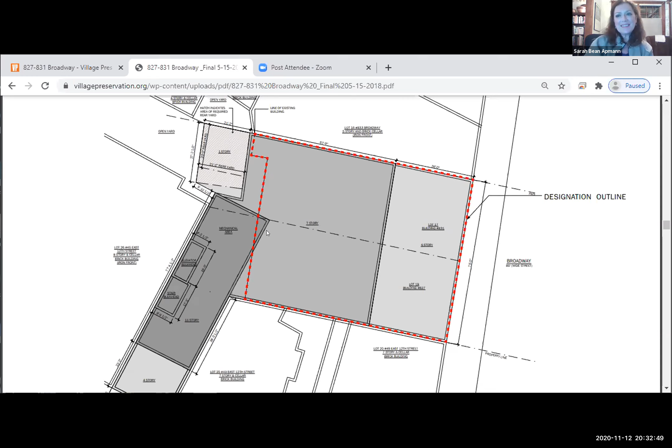Sure, no problem. I just wanted to say in response to that comment that it shouldn't have been approved, that that's actually not the case. What was found was that there was a procedural deficiency and that we should have returned. The judge found nothing wrong with the approval in any other capacity other than we should have returned to the community board. And that's why we're here tonight.

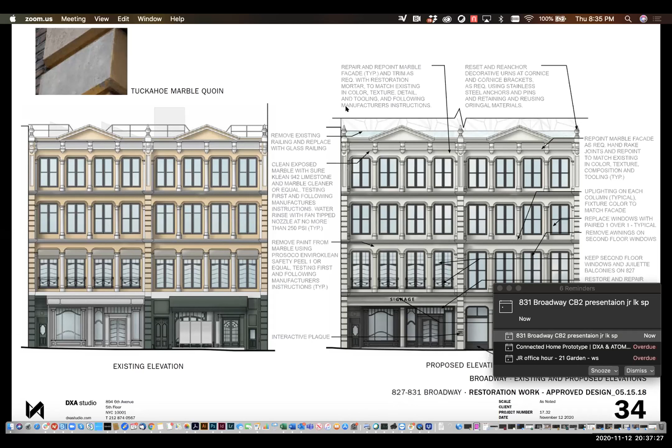And lastly, before I conclude, I do want to emphasize that there is a significant issue here with respect to how this building will appear within the district. I recognize it is not part of the Greenwich Village Historic District at present, but I think it's incredibly important to consider what this will look like, particularly from the vantage point of slide 13, where if you're standing about 25 feet from the building, you can see—if someone could show that to me, I think it was 13.

Thank you for pulling that up. Yes, you can see quite clearly the building in the back, as well as the rooftop addition, the 3-story and the 4-story rooftop addition on top.

If you look at your agenda, it's listed by the applicant as a 3-story addition, but I want to emphasize to each committee member, this is not a 3-story addition. It is a 7-story addition. And as you can see from this rendering, that 7-story addition is fully visible and does reflect on the two buildings in front.

And so again, I ask that you please await my submission of written materials, because I do think it's important that I have the opportunity to present the arguments and information to you. If you don't have any questions for me, I'm glad to close. But I do know quite a bit about this building and the lawsuit, so if anyone has any questions, I'm glad to answer.

From the committee's point of view, typically we take submissions ahead of time. We take submissions after, which can only properly weigh on the discussion by the full board, because we are required to come up with the essence of our resolutions that we bring to the board at this meeting, since it's a public meeting. So what you have said will weigh much more, and anything submitted before the end of the period will need to be incorporated into the board discussion.

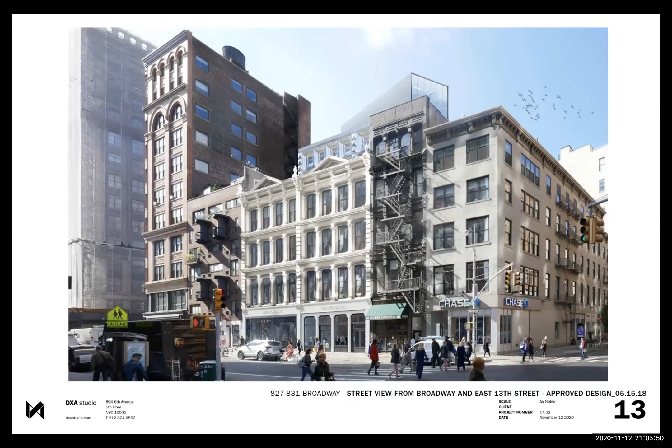I'm so sorry, I just can't raise and lower the hands. Oh no, can you hear me now? I do not live on 12th Street, but I am interested in the neighborhood.

I was looking at the community board announcement, and it said a 3-story building on top of the structures in question. It's entirely misleading. Even when we got the plans, which we didn't see until today, we looked at the plans and I saw one picture of a 3-story structure, and then I saw another picture of an 11-story structure.

It wasn't really until we got here tonight that I knew the scope of the project. Sir, would you please just state your point? We are aware of all the things you said.

Okay, well, my point is this: I find there was a lack of proper notice. The structure is even larger than the initial structure. There was a lack of proper notice, and I would like you to adjourn the determination on this to your next hearing, so we can adequately review it and respond.